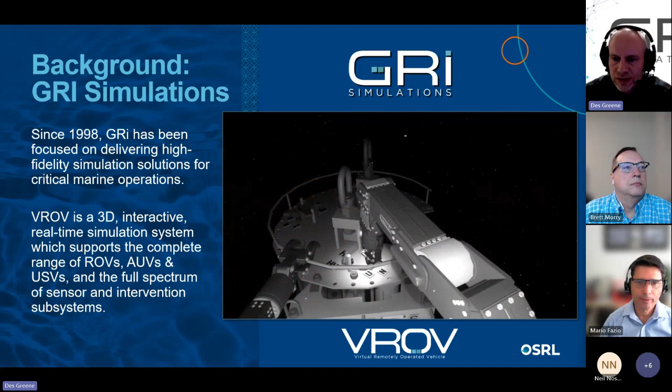The video shown here is a rigid well jumper installation being performed by two ROVs working together to operate the twin connection actuation tools, which lower and lock the jumper on the manifold and tree hubs. This is one of the more challenging simulation scenarios from the first project I worked on at GRi nearly 20 years ago. And we simulated the installation and operation of all equipment in a major oil field in the Gulf of Mexico. These simulations were used by the ROV service provider to train their operators and perform pre-dive hazard identification studies and mission rehearsal to enhance operational awareness and reduce risk.

Next, we'll have a look at a recent case study where we use the simulator to support an emergency response exercise. But first, some points on why it's useful. Simulation provides a safe environment to practice emergency response without real-world risks. The technology allows teams to test their response plans, identify weaknesses, and refine procedures. By simulating various scenarios, organizations can enhance their readiness and ensure effective coordination during real emergencies. Short of the actual mobilization of assets, use of this technology in source control exercises is seen by some as an industry best practice.

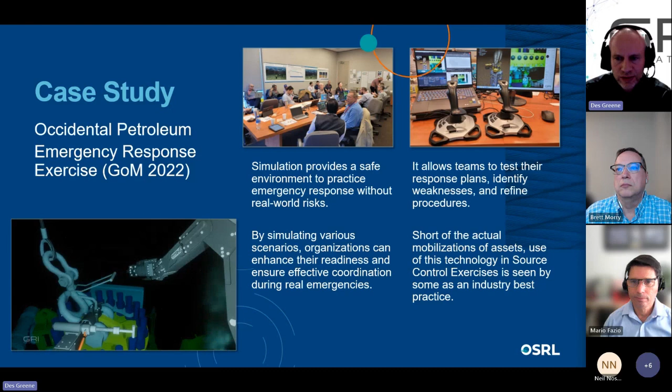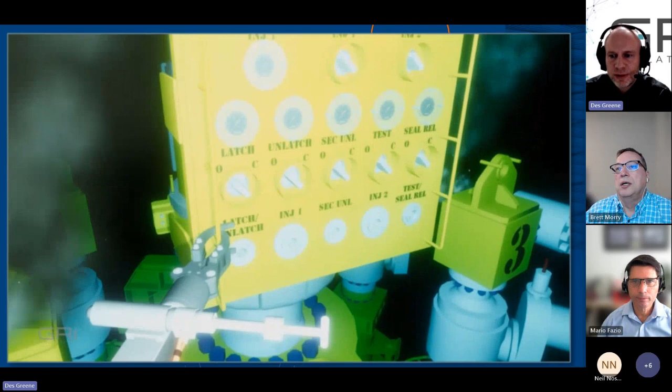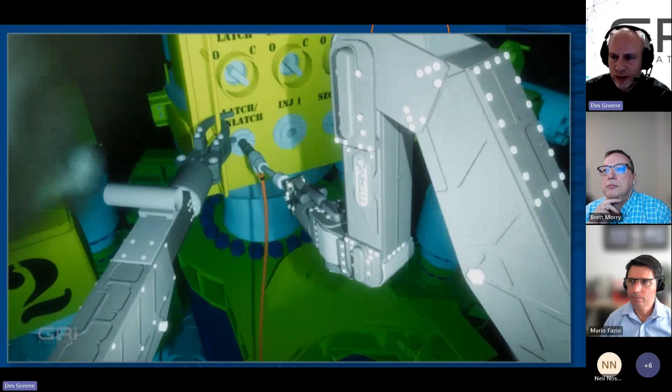So we'll have a quick look at what's going on in this video here now, and I will give a little bit of a description of what happened during this event. So back in October 2022, GRI were involved in a large-scale Tier 3 emergency response exercise organized by Occidental Petroleum in Houston, Texas. This event featured the MWCC, or Marine Well Containment Company's, capping stack to provide an interactive simulation of the well capping equipment installation and operation procedures.

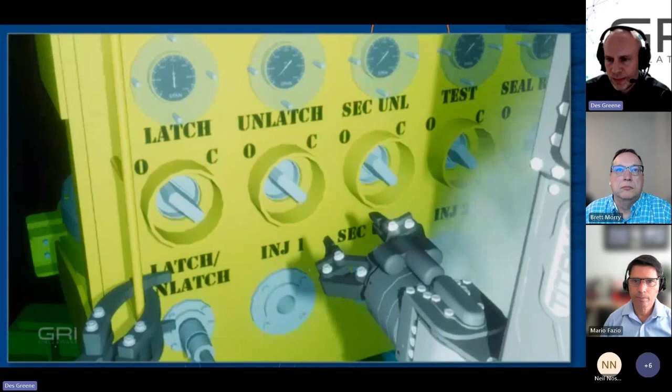The different teams involved in the exercise were organized into breakout rooms where they could all watch the well capping simulations being streamed live on YouTube, with some groups interacting with the VROV simulation operator, directing the actions of the ROV to function the virtual equipment based on the outlined procedures.

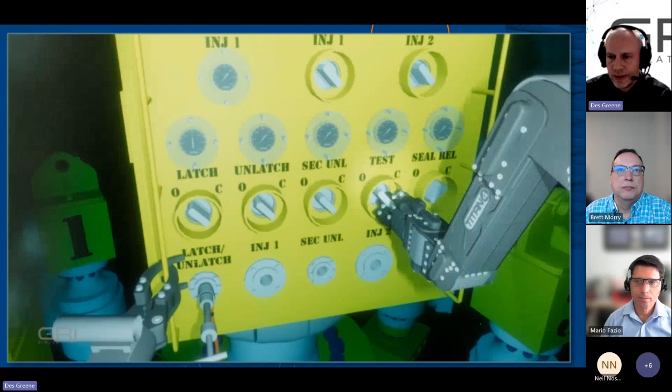I piloted the ROV during these live simulations, and they actually designated one of the source control engineers that was sitting by me as my ROV supervisor. So he was responsible for reviewing the capping stack operating procedure and giving me timely directions on what steps in the sequence to do next. And this was based on continuous communications that our breakout group were having with the flow assurance team. And they were actually monitoring the pressures building on the capping stack gauges as the procedure progressed.

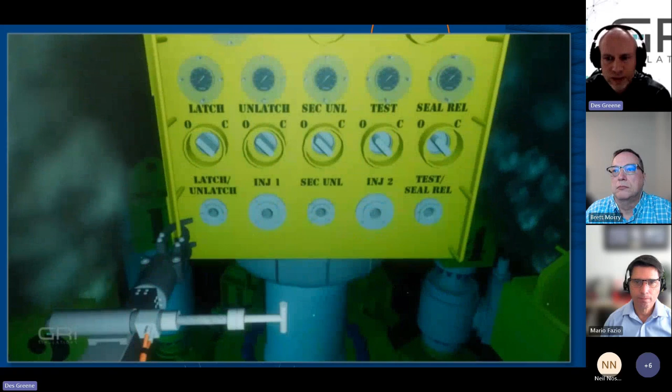The simulation was designed to mimic conditions of a particular well with pre-calculated pressure response curves that were integrated into the simulation. The simulation proceeded according to the operational plans until the full soft shut-in procedure had been completed successfully, stopping the flow of oil from the central bore of the capping stack. Feedback during the event's lessons learned session was seemingly unanimous that the simulator had provided a greatly enhanced and immersive exercise experience.

Okay, so with that, we're going to give you a sample of what one of these live demonstrations looks like. Neil will be operating our VROV simulator. And just so everyone knows, we're operating out of Newfoundland, Canada right now, so we're on the other side of the world from some of you. So Neil's going to operate a virtual ROV, and we're going to do a site survey operation. So this is a site survey on an offshore asset that's just had an incident. We're going to go in and check it out and see what's happened there.

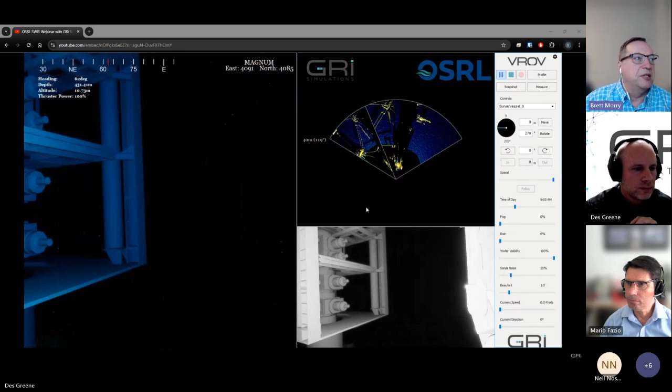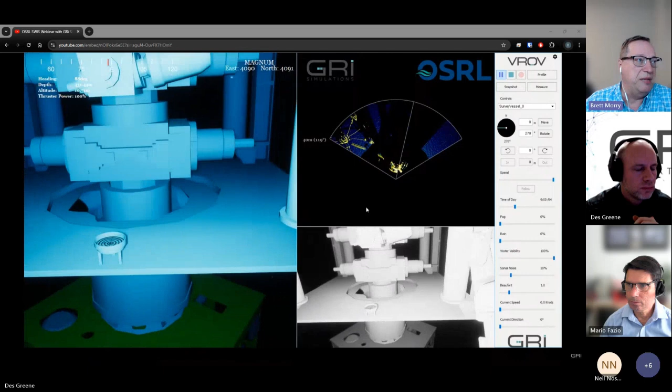So what we're doing here is if this was in the exercise, we would have a mission plan. We'd have a certain list of things that we would want to achieve or assess as part of our site survey. One of them would be, first off, we want to check the inclination on our BOP to see if it's vertical. We really don't know the condition of everything yet. For this scenario, we do know that we had a DP runoff, and we don't think we had a successful LMRP disconnect based on the weights on the top tension on the riser.

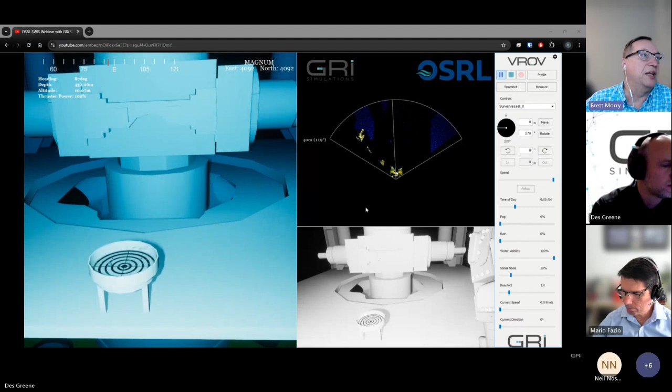So looking here, we see the eyeball or the bullseye. This is a 5-degree bullseye. Each one of those stripes or circles is 1 degree. You count those from center. We're looking at 2.5-degree inclination. In this instance, the ROV, if you look at the video overlay up top, it's saying it's looking east. So that indicates to us that this stack is angled 2.5 degrees to the north, which ties in with the reports that we had from the drive off, drift off, that the actual rig went in that direction.

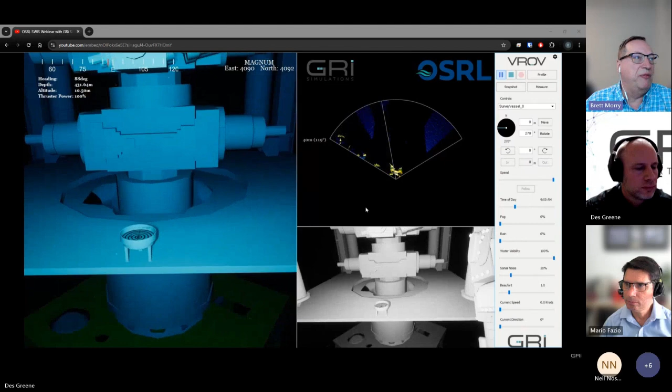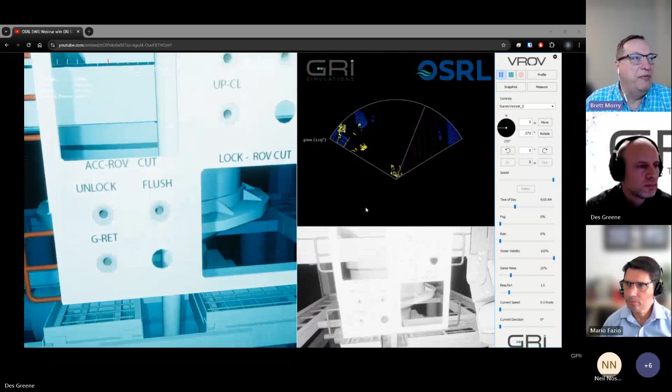So Neil, if you can start coming up, looking at the BOP, and as we're going up, if you can look at the BOP panel. One of the critical things that we need to assess when we're doing our site survey is if we have access to the BOP panel, because one of our critical missions for source control would be to try to do a BOP intervention mission. In this instance, we would try to regain control of the BOP itself by using hydraulic fluid to try to close the rams, either the blind shear or the casing shear. And if we're able to regain control of the BOP and shut it in, then we can halt the flow. And that takes a lot of pressure off of everyone.

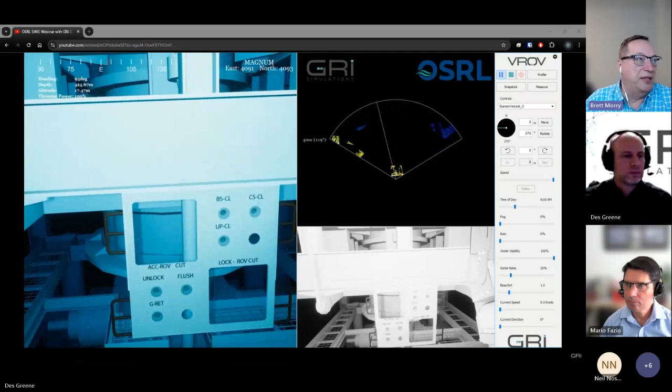But anyway, at this stage, we haven't done that. But what we have identified is we do have access to the panel. So that is a viable option. So that's critical information that the BOP intervention team would need to take away. They would check to make sure that the ROV panel matches the P&IDs, et cetera. Anyway, let's continue up here now.

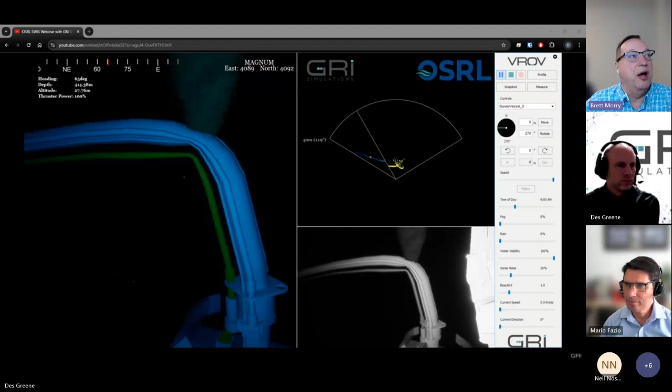It's evident here that the LMRP wasn't disconnected because we're staring at it. So that's still there. And we keep coming up. And we'll notice we still have a riser. Okay, I think we found the source of the discharge for the oil. So right now we know that we have a debris removal mission staring at us. The first thing we need to do is we're going to have to try to remove the riser section here, and odds are the recommendation will be to remove the LMRP as well. So from a debris removal standpoint, this is going to be pretty complex. But all of this stuff has to be done in advance of landing a capping stack.

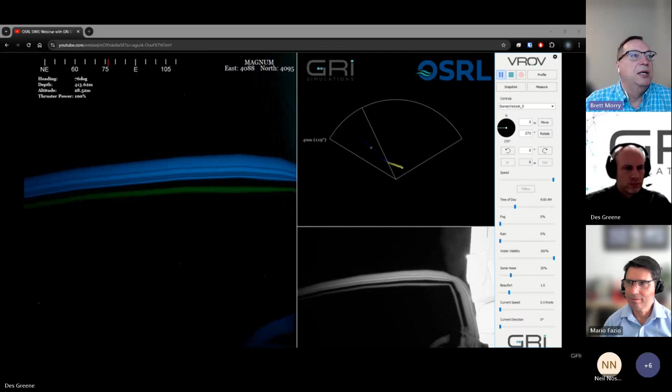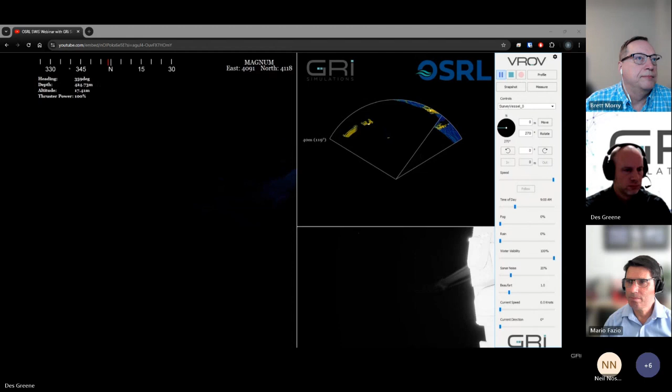So just like we're identifying the inputs for the BOP intervention, we also need to start looking at the entire field here for debris removal. So yes, if you'd mind continuing coming down, I'd appreciate that, Neil. We're trying now to get the extents of the riser, how far away it is, how much is on the seabed, etc. Keep going. You got a tight tether there, Neil?

Okay, we're starting to pick up some of the seabed here in the low light camera in the bottom right. And this is indicative of what you would see offshore. Okay.

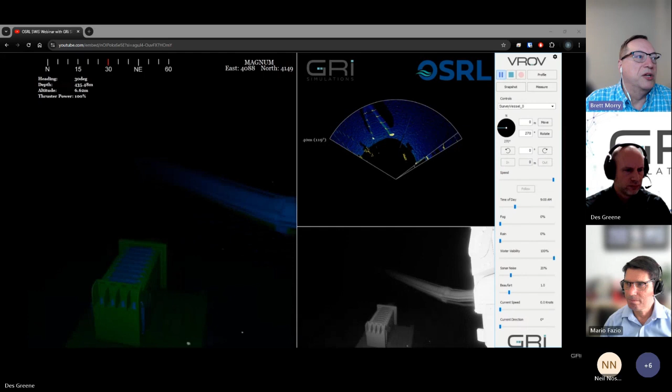So we have a subsea architecture there. We have a tree subsea. We have the riser falling down. We actually have what looks like a chemical distribution assembly here, UTA, and we actually have the riser laying across next to it. So let's just head back up to the BOP, please.

And so what we would do in this instance now, we would actually take a lot of time doing sonar scans of the seabed to see if there's any broaching. We would look at all of the other existing infrastructure to make sure that there's no damage. And then, of course, we would need to start making plans for removing the riser section here. We had to be very careful, of course, because of the infrastructure. But we would then go ahead and start planning for that mission.

So I guess we'll sort of halt it here. The next couple of slides, we're going to give you a high level overview of what the dispersant mission would look like, as well as what a debris removal mission would look like. And we can go ahead to the next one.

And with that, I'll just hand it back off to Des. And then I guess, Neil, if you can just go hang out in the TMS and we'll go from there. And then later on, we'll invite people to direct the ROV pilot to do things. Over to you, Des. And you're mute.

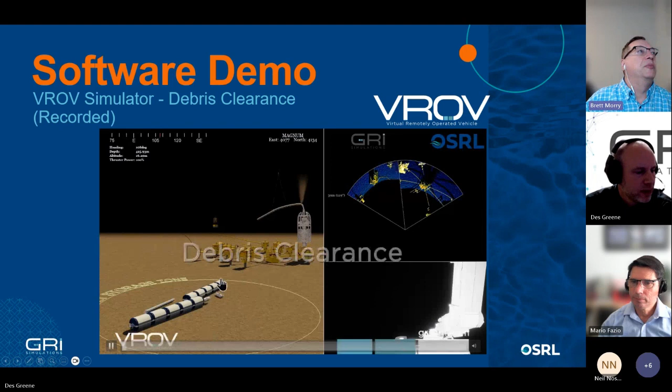Thank you. I'll just skip back to the beginning here, and I'm going to pause this for a second, just so we can have a look at what's happening here in front of us. So, yeah, we have a pre-recorded simulation that we did for this part. We'll check back in with Neil near the end, and we can do some extra things in that site survey scenario. But this is the debris clearance operations. As you can see here, some of the pieces of the riser have already been chopped up and they've been stored in this wet storage zone, this area over here that doesn't have any field architecture.

So you can see that there is a big piece of that riser still suspended there that we need to get rid of, and that's what we're going to go through, chopping that up and moving it to the wet storage during this simulation.

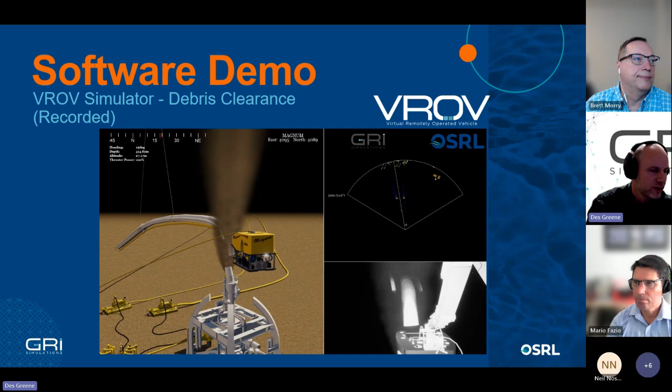So then once that has been released, that's also just going to be dropped off. The ROV operator will guide the vessel and the crane operator into position so that they can lower this into place in the wet storage zone there. And now we'll take a look at the next step that we have defined in this sequence, which will be some dispersant operations.

Now, before I go on here, I'm just going to do a quick pause and have a look at what we've got going on before we proceed. You can see after we chopped up this riser and moved it to wet storage, in between that last piece we saw and the dispersant that we're going to do next, they've also removed the LMRP and transported and lowered it into the wet storage zone also.

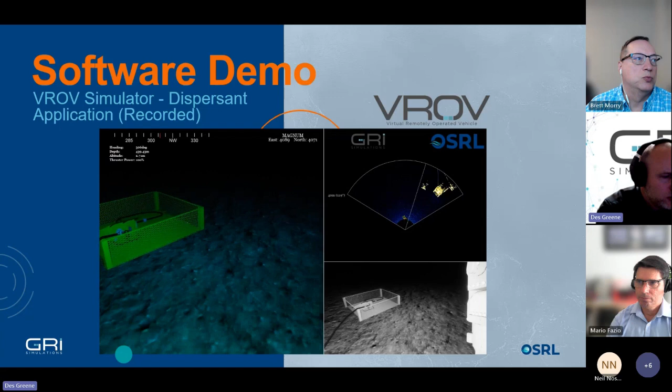And some of the dispersant equipment has already been installed, and the equipment has been connected together with the flying leads that you see here plugged into the ROV panels. So after the dispersant deployment frames have been deployed and connected, the final step is what we're going to see here, which is actually actuating the flow of dispersant from the wands here and placing that into the flow of oil that's coming out of the BOP mandrel.

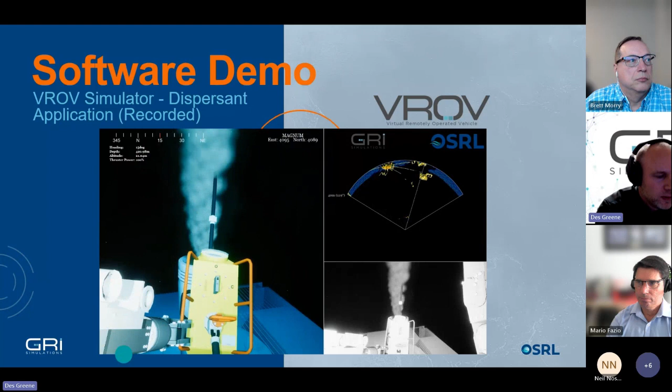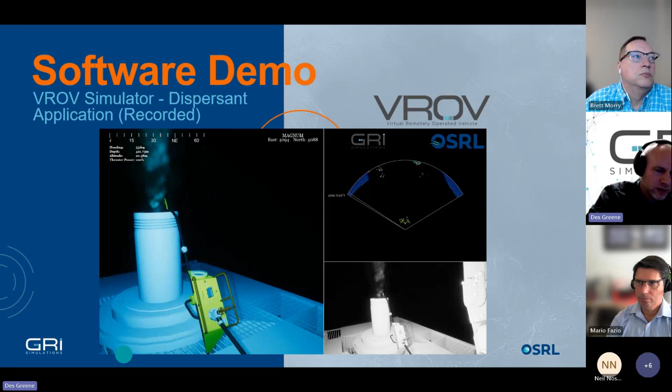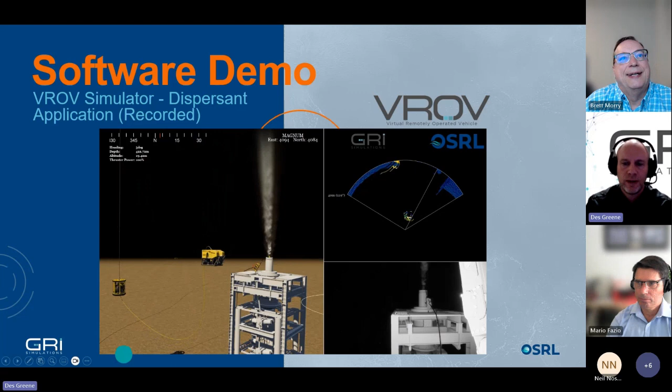So there's a couple of different styles of these wands that we have in the simulator. We have, I think, 3 different radius of this hook style dispersant wand, and we also have the handheld wand that an ROV operator can just hold, manual flying on point, holding the wand into the dispersant with the ROV as opposed to hooking on like this. Okay, let's click over to the next step in the process.

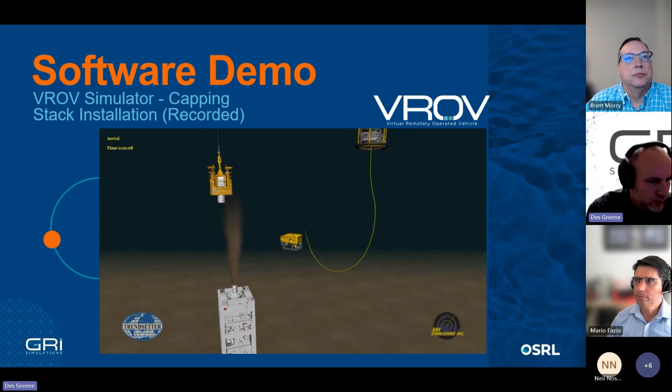So this video, this is actually bringing in the capping stack. Now that we've got the debris out of the way, we've had some dispersant injected into the plume to reduce the effects there. Now we're going to bring in the capping stack and try and shut this thing off. Most of the other videos we watched were captured recently. This was an old one actually that we did right back with Subsea Well Response Project before it changed over to SWIS. And this is what was delivered with the kit back then.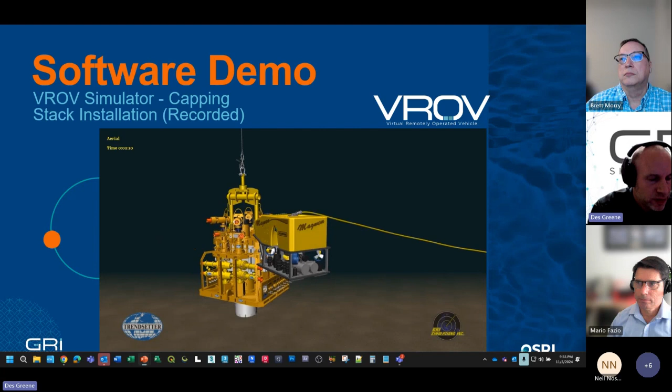So the ROV pilot, of course, picks up the capping stack here in the water column and is going to direct the vessel and crane operators to get this into position directly above the BOP mandrel. Of course, this capping stack, the SWIS capping stack that we see here, was made by Trendsetter down in Houston. We've been working with them since they started making these capping stack equipment for subsea well response and marine well containment that we saw earlier in the Occidental case study.

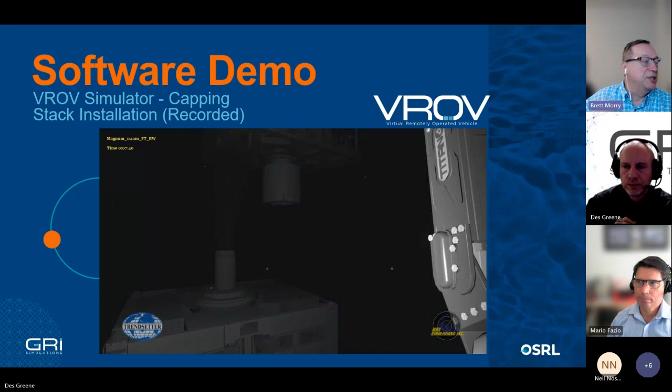I'll actually click through a few of these, skip ahead a little bit just so we can see what happens. And for people familiar with the OSRL asset base, this would be either the Brazil stack or the Norway stack. Both of those would be the RAM-based 15K capping stacks. I think we've done a few of the other ones too, Brett, maybe the 10K and possibly rapid cap. Yeah. So you've got ours. You've got the Guyana stack that we have, which is different from this. You have that one model as well, which we can utilize in scenarios. And then you have the MWCC and the HWCG stacks as well here in the GOM.

So it looks like we're right over the mandrel here now. Next step is just to lower this into place until it starts taking up some slack in the rigging. So I'll just click ahead here till we have it landed out. Of course, these operations take a lot longer than we're seeing here on the videos. So once we're landed out, we want to go through the process to function the valves here to latch the capping stack onto the mandrel.

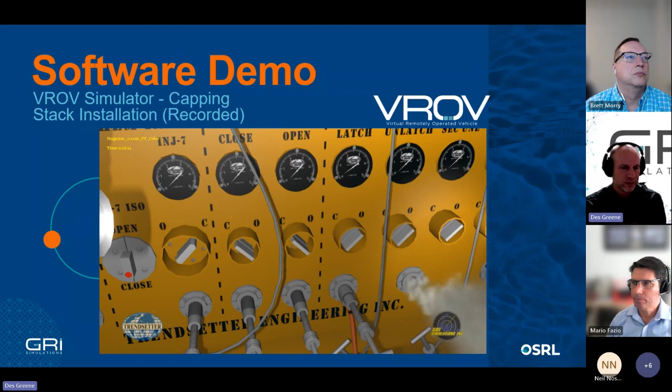So the pilot, or the ROV supervisor who's directing the pilot, would be reviewing the operations procedures and going step by step to open and close these valves in sequence. And then we can actually see the pressure gauges build and stuff. We can see the control fluid coming out of the designated valves and that kind of thing. So it's a really advanced high fidelity simulation that looks at every aspect of the procedure, right? All of these suspended dummy stabs, the control fluid. And as mentioned before, this can be tied into pressure response analysis that's been done previously on a per well type basis.

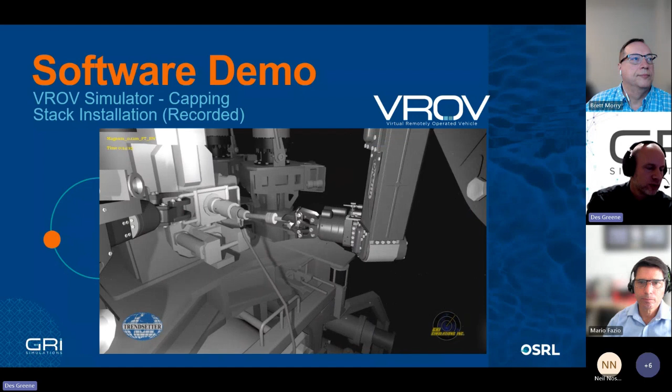So beyond just landing out the capping stack that we're seeing here, okay, it looks like the latch has been engaged and we're going to release the rigging now. But beyond installing the capping stack, we have simulations that go through the full procedure of operating this thing, including contingencies for things like changing out gaskets, swapping out one of these choke legs if we have a problem with them. But the operators get to go through the full set of operations to close off each of the choke legs in sequence, and then finally actuate the rams to stop the flow of oil coming through the central bore there.

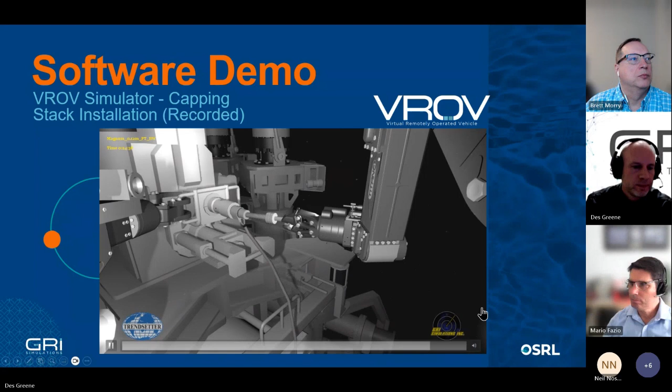So last step, the running tool has been released, and that's going to be recovered to surface. So capping stack's been installed. Now only a couple of steps left, and we'll have that thing sealed up. Okay.

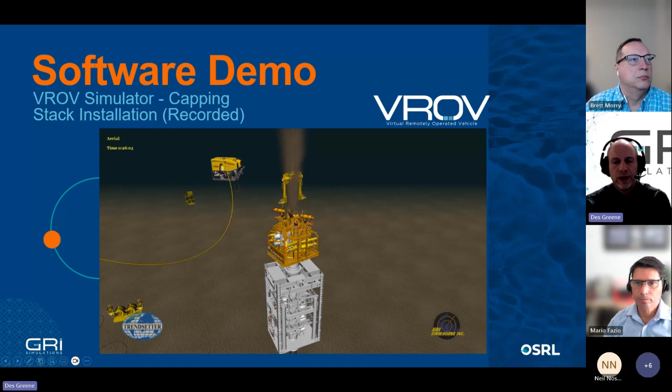Back to you. I'm not sure if Brett or Mario wants to take this one, just to sum things up a little bit before we switch back over to Neil there. Brett, you want me to take this? Yeah, go ahead.

Okay, so just a quick one on the software and the demo and what you've just seen. Obviously, this is a value adder. It allows for that cross-team collaboration. It links up within that source control branch, the flow engineering team with the subsea team and other elements of the source control branch. It provides a real-time display during the exercise of that subsea environment and puts that sort of heightened sense of realism into the exercise.

So all the various missions required to cap and shut in a well are represented in the simulator, from the earliest piece where you saw the on-site survey all the way through to capping stack deployment and operation that you just saw there. And so it really puts the subsea well response, capping, and the other various missions associated with capping right front and center for your exercise.

And really importantly, and I really wanted to highlight this, is that the source control team works hand in hand with the ROV pilot and supervisor to direct those missions in a realistic simulated environment. So it provides that really heightened sense of realism in your exercises. So I think essentially that's what I wanted to say. Brett, is there anything you wanted to add there?

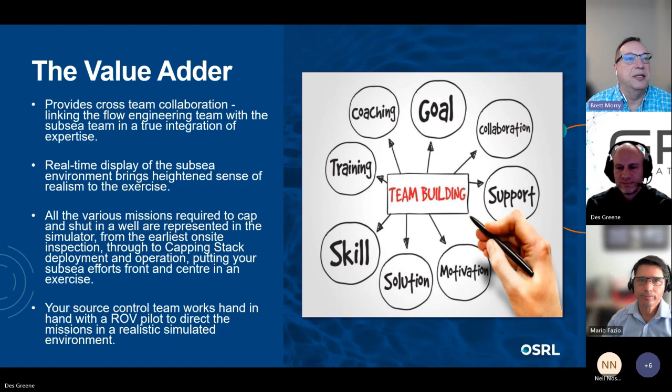All right. And I think that's reflected here. Des and Neil are in St. John's, Newfoundland. And in the next slide here, we're going to go back to the live demo again. And I'm going to ask Neil to sort of free fly and give us a flavor for all of the strengths of the simulator, because it's more than just what you see at the seabed. There's a surface component. But if we can go back and Des show the live feed again. Yeah, I'll flick back there.

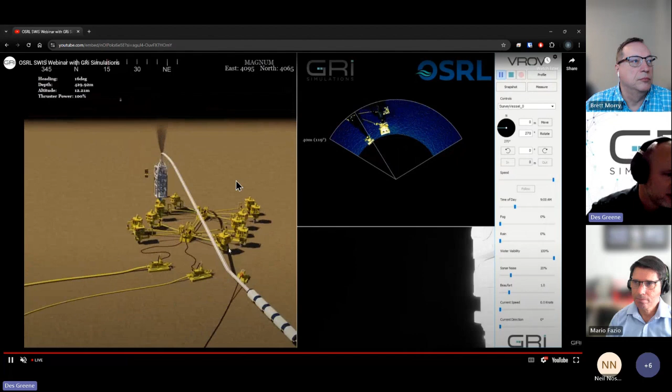So here we are. We have a pretty fully fleshed out field here with a couple of manifolds. Looks like there's about eight or 10 wells, maybe 12, and a couple of PLETs running off, maybe to an FPSO or something like that. And there's the UTA. So we have the UTA that's underneath the downed riser there in a precarious position.

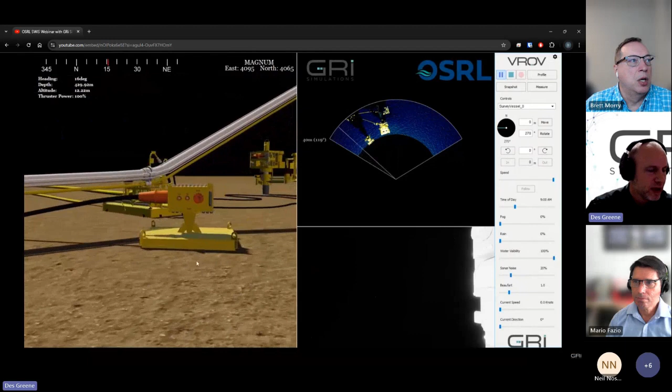So this is just a generic oil field that we're using for this demonstration, but this could be your oil field, right? We can customize these simulations so that they use real world bathymetry, and the scene is georeferenced to your location. And we could actually have your equipment models in there, all connected up the way that they are in reality. So basically an operational digital twin that we could run these simulations through.

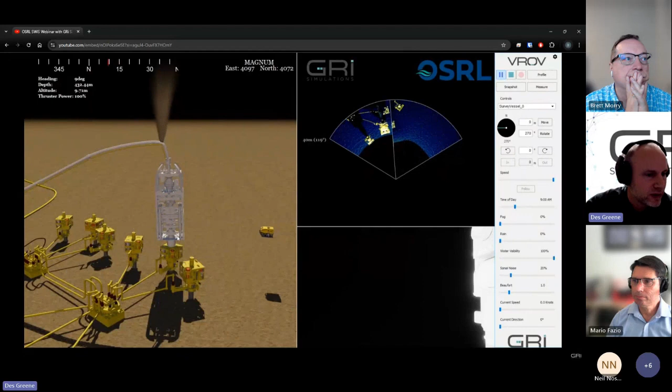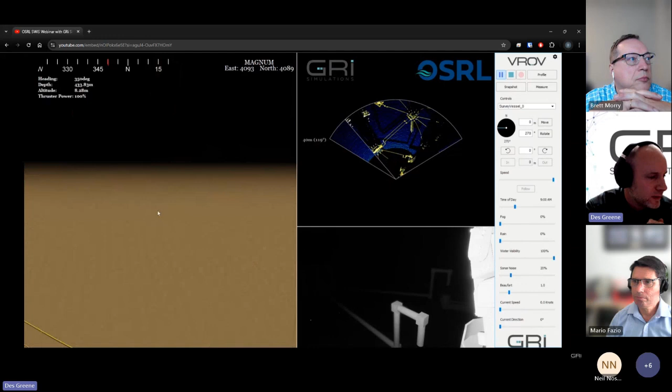Yeah, so Neil, just go over and have a look around at a few things. We had a couple of things that we wanted to show. Oh, sorry, I got to click back to there. Why don't we go up to the ocean surface, Neil, and just see what's going on up there. We got some of the surface vessels up on the top there, and that's what's actually been used to deploy the ROV here, and I think one of them might be used in the later scenarios as a dispersant vessel.

We can also change things in the simulation, like environmental parameters. So using this control panel on the right here, you can see there's a bunch of settings. I'm buffering again, Neil. All right. You can see there's a bunch of settings there. Neil, you can just go through some of those sliders. Time of day is the one he has grabbed there. We can make this so it's nighttime or morning. I'm getting a little bit of buffering here now, Neil. Okay, there he goes. We got nighttime, daytime.

How about the fog and the rain? We can bring in some fog. We can bring in a storm. Make it look not so nice out there. This is the weather we usually get around Newfoundland. It's like this 75% of the time where we're from.

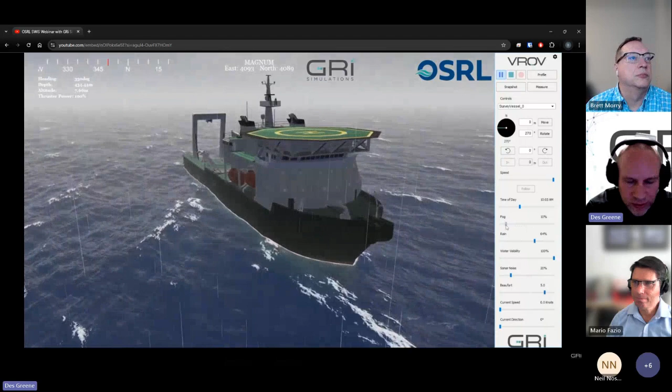And we can also change the sea state. So this is a level of difficulty here. So things like the sea state based on the Beaufort scale, like you see here. We can also change the underwater current, speed and direction, so that the ROV pilots would actually have to struggle against the current to get from point A to point B. And if the vessels are heaving like this, of course, anything suspended from the vessels will be reacting accordingly.

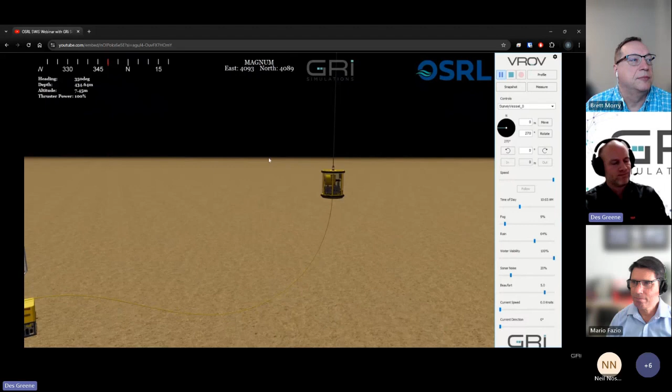Neil, you can go down subsea there and just look at the TMS. So yeah, you can see now that we're up at Beaufort 5. The vessels, of course, are rocking back and forth, and the tether management system here is heaving up and down. We can also implement active heave compensation for any cranes that might have that enabled in the simulator to get realistic effects like that.

What other things? Well, we can show the field layouts, right? So we have all these nice 3D models here, but these are all positioned according to real-world field layouts. Those usually come in 2D files, maybe a drawing or a GIS file. We can import those into the software, and we can overlay them on the ocean surface or on the seafloor. I think for this one, we probably just have them overlaid on the ocean surface, but we can take them layer by layer and actually drape them over the terrain if we want to, or have them project through pieces of equipment, whatever makes the most sense visually.

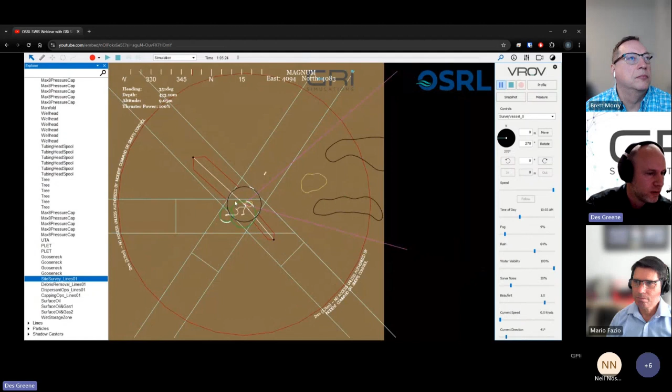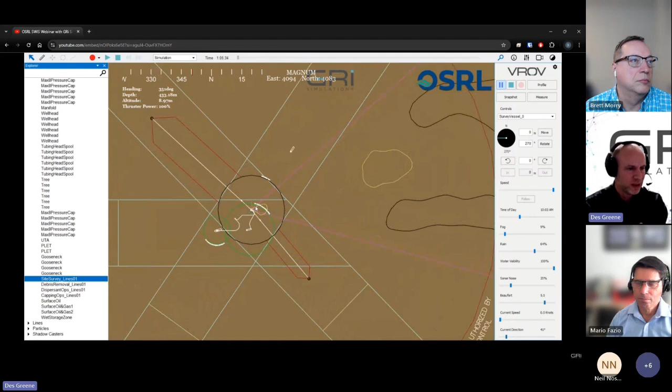So you can see this is our layout here. We have an operational layout that we can bring up when needed. And we're doing this live simulation. It's a simulation, but we can also set up the software to be more of a real-time monitoring solution, where we're taking real-time positioning data from vessels, ROVs, any equipment that has a transponder on it, and we can give this kind of view in real time as a real operation progresses.

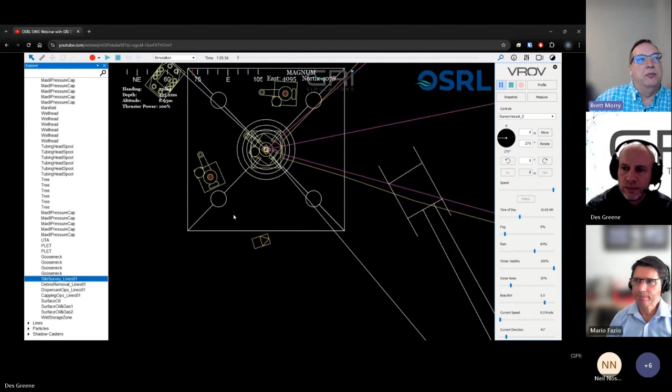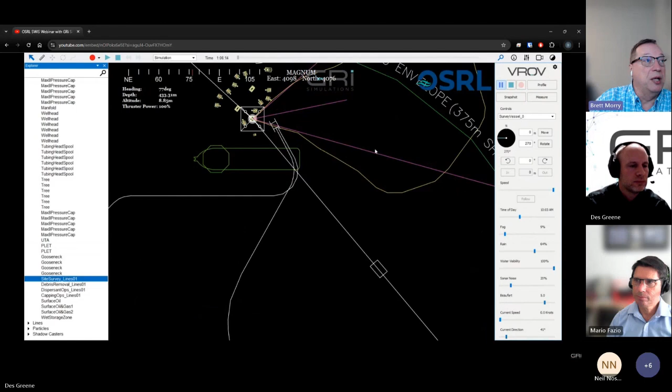Yeah, so let's speak about that for a second, because if you have surface vessels, we can take the live feeds if they're available, either through AIS or whatever. We can display them in this, and then we can feed this into your common operating picture as well. We can also present on the surface here if you have trajectory modeling for your spill. We can model that into this system as well. So it is a full 3D immersive environment. It's not just an ROV simulator at the seabed.

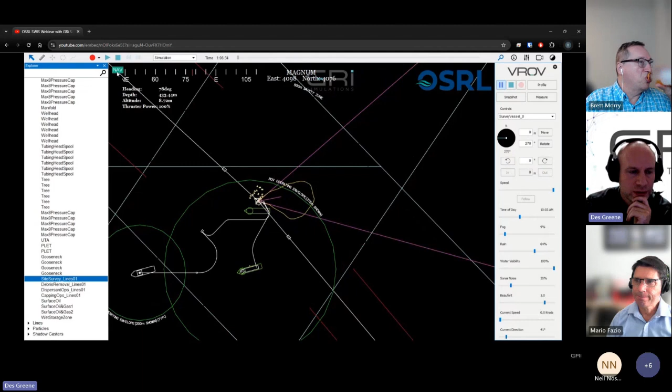Some other interesting features of the software: log files, of course. A lot of those videos that we saw of some of the other procedures were captured from recorded or logged simulations, and then we can play those back. You can rewind and fast forward to get to points of interest.

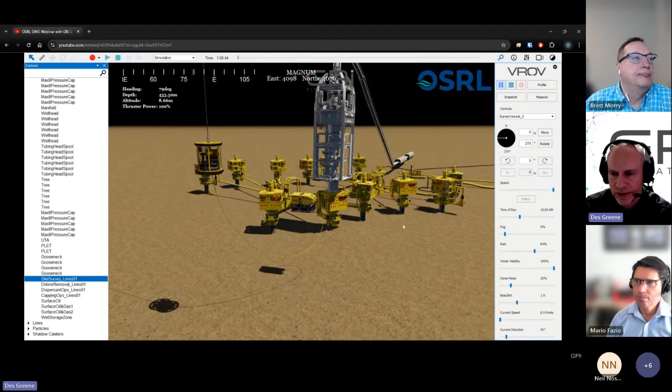We can also take snapshots. So you could take a snapshot anywhere during a simulation so that you can restart from that same position again. We like to do an interesting one called shift change, where you put the ROV into a horrible position, maybe wrap the tether around a couple of pieces of equipment, then you take a snapshot, and you get up, you're done your shift, and the next guy has to come in and figure out what to do with the mess you just created.

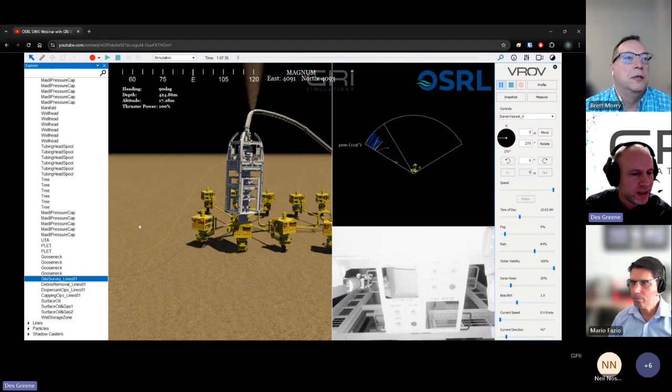Yeah, and what about grabbing onto some stuff, Neil? Can we grab the ROV panel there? Just to show it. The dynamic fidelity of the simulator is very good. We can do a lot of really complex interactions, multiple vehicles, multiple manipulators, handling articulated equipment, ROV hooks and shackles and that kind of thing. So you can really get a lot going on in here.

It can have some seriously challenging simulations that you have to really focus to get through. Very wide range of tooling, of course: hydraulic hot stabs, cutting tools, cleaning tools. Most operations that an ROV pilot would face in reality can be simulated in here for rehearsal.

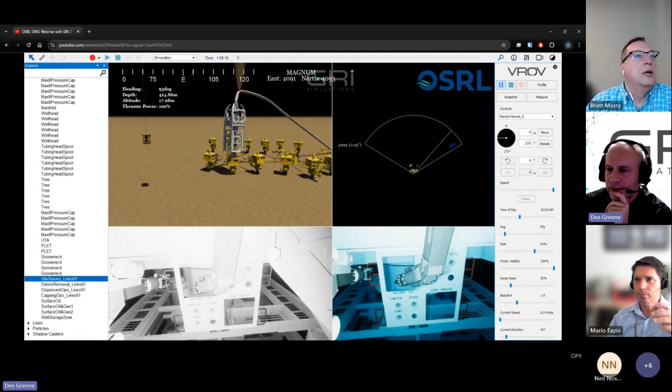We were planning on getting some attendees, I think, to direct the ROV pilot, but I don't think anybody's able to provide.

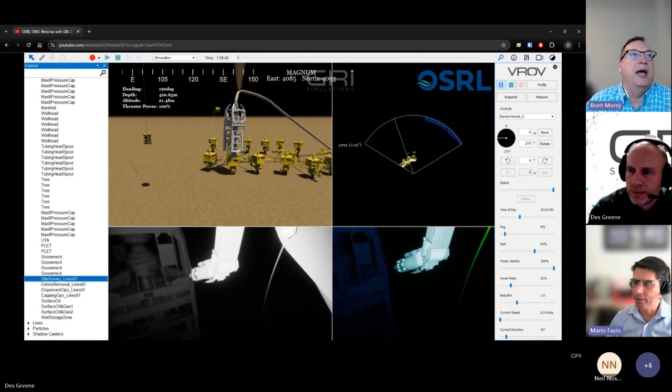Well, what they can do if someone's interested: if they want to raise their hand, I can unmute them if they want to speak, or if someone has a particular question they'd like to ask, we open it up to the floor now. Just raise your hand and I'll unmute you. Or put it in the chat, Brett. Yeah, you could type it into the chat. Even if you want to direct the ROV, if you want to direct Neil into doing something, put it in the chat, and that's probably the easiest way.

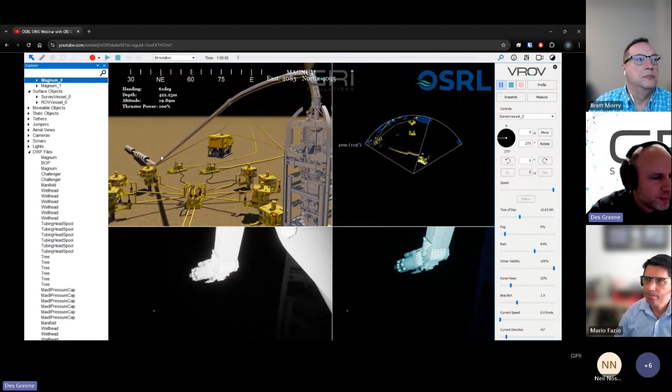Sure. I'll give them the first direction. Neil, why don't you go down and just put the ROV down on the seafloor next to one of the trees, just to show some of the dirt kick-up effects once you get down there. And then before you come up, maybe snag your tether on the corner of the tree or something like that, just to show that type of interaction.

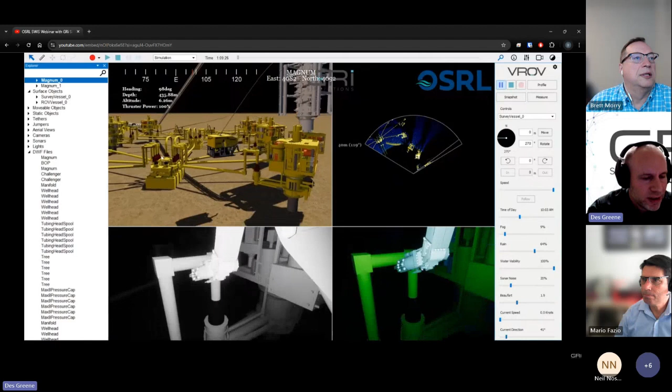We also really put a lot of effort into getting the lighting correct. Even so far, I think the programmers, in the latest pass on the lighting, even introduced the effects of different amounts of chlorophyll in the water, so that some of the backscattering comes through as green or blue sometimes, depending on the chlorophyll levels.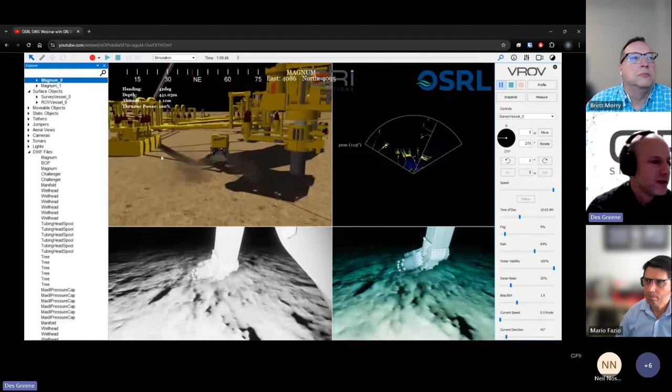So you can see here as Neil is putting this vehicle in a horrible situation. You'd never do this in reality, of course, but he's just kind of skimming off the seafloor there. You can see the dirt clouds getting kicked up. So sometimes a pilot will kick up some dirt there and either have to kind of sit in that cloud until it goes away or fly up out of it.

Just showing some of the tether interactivity here. Of course, if you aren't paying attention to your tether and you go around doing a couple of operations, hopefully not in this horrible situation, but you could easily get your tether snagged on a piece of equipment. So that tether management skill is one of the main skills an ROV pilot has to learn. So it's a very important feature to have that dynamic fidelity where we can show all of those challenges in the simulator here.

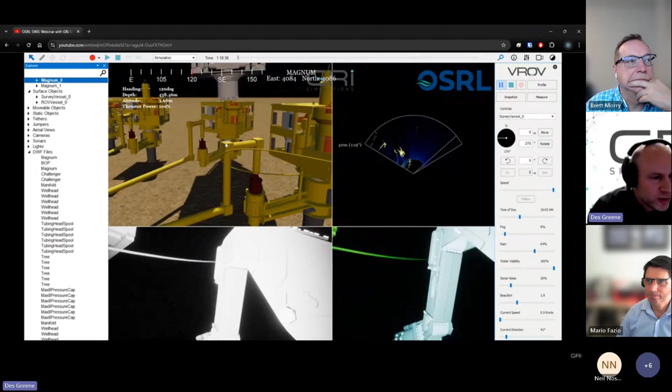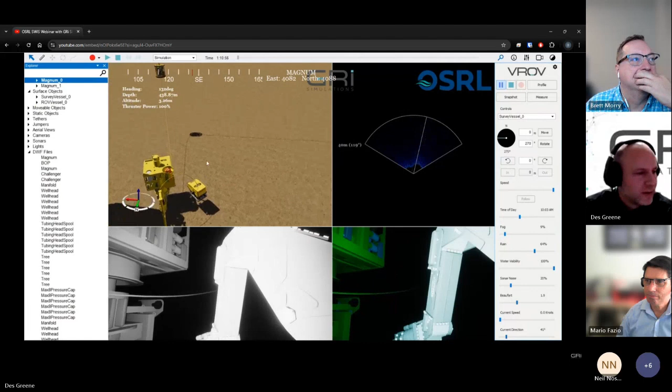What about the current, Neil? Have you turned on the ocean current yet? Did we show that one already? Be good to show it here now while we've got the ROV next to a tree. Of course, we are snagged, so let's just turn on the ocean current. So once Neil ups the speed here, we should see the vehicle getting pulled away.

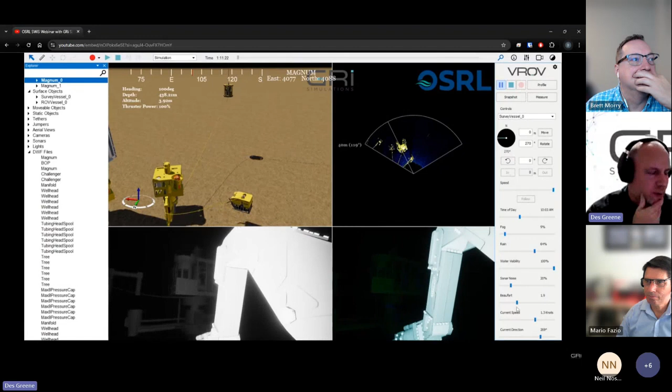Yeah. So, during training, we have the ability to put the training objectives up on the overlay here and kind of step by step guide the trainees through. And then at the end, we can output a summary report based on if they got all the tasks completed and the time to complete each task. But then we can introduce levels of difficulty. And one of the things to up the difficulty is to increase the ocean current.

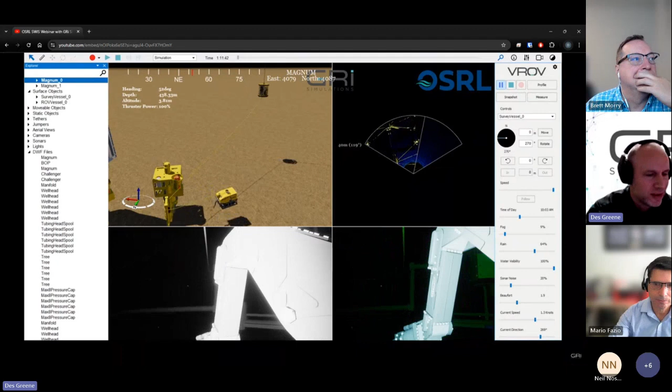And we can also do things like increase the sea state and bring down the visibility so it's hard to see from far away. So why don't you give that a shot, Neil? Just change the visibility slider there so you can hardly see that tree from where you are now.

I'm buffering again. Okay, I'm caught up.

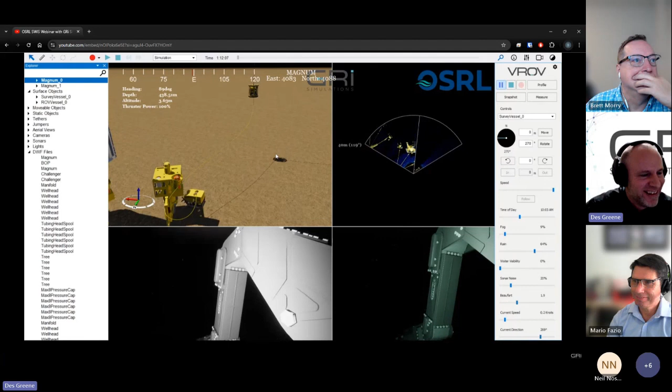Okay, so yeah, Neil, oh, there it goes. We almost lost the front of the manipulator as well. Yeah, so it's a bit harder to see. So as you can see, really full-featured simulation software with considerations for a lot of different aspects of the environment and the functioning of the equipment. This is really pretty important, of course.

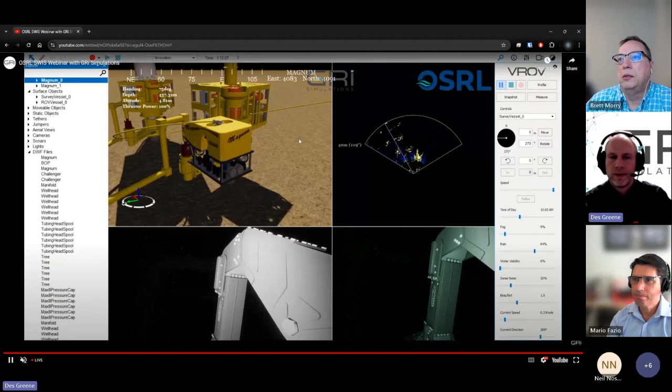All right, thanks, Des. I think probably at this point, maybe just encourage the audience to post any questions they have, or if you still want to direct Neil to do something specific with the ROV, you can do that. But we'll just open it up to the floor. We've got just over 10 minutes, 13 minutes left. Is there anything in particular anyone wants to ask? I've just got the chat open now.

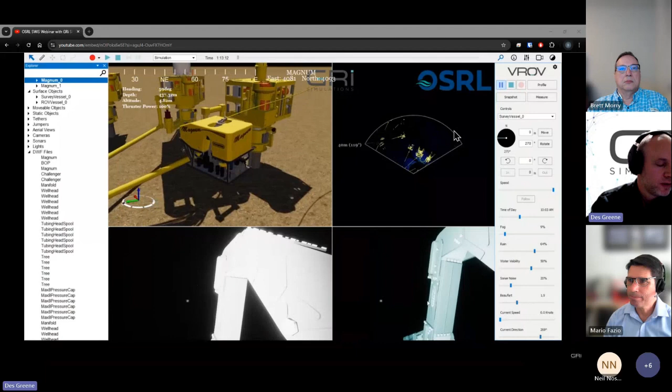A couple of other notes, I guess. Neil's currently flying using, I don't know if you'll be able to see this, just an off-the-shelf gaming joystick, just for this quick little demonstration. But we also have the ability to do a full integration into the real-world control system. So the pilots and operators will be able to use those during the simulations to get that real hands-on feel.

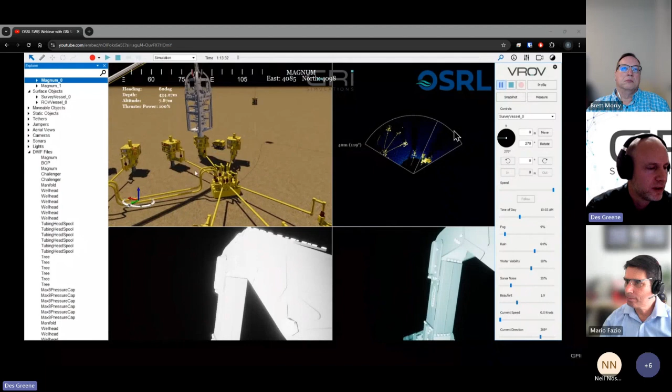All right. I'm not seeing anything come up on the chat. Give everyone a few more seconds. Anything you want to post?

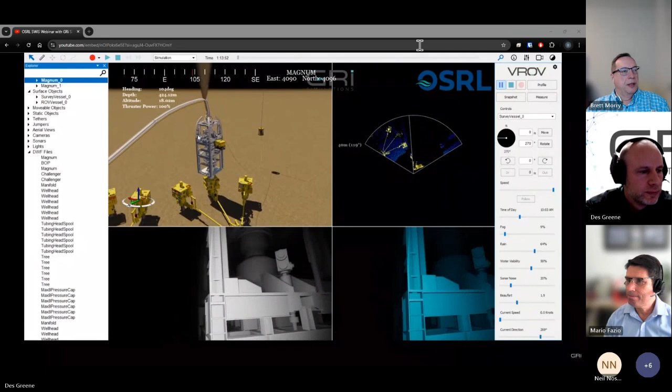Yeah, so the real intention here was just to kind of demonstrate that this was a live session, right? I think that's been apparent as we've been directing Neil around to do different things. We only covered a small, I guess, aspect of GRi's capabilities.